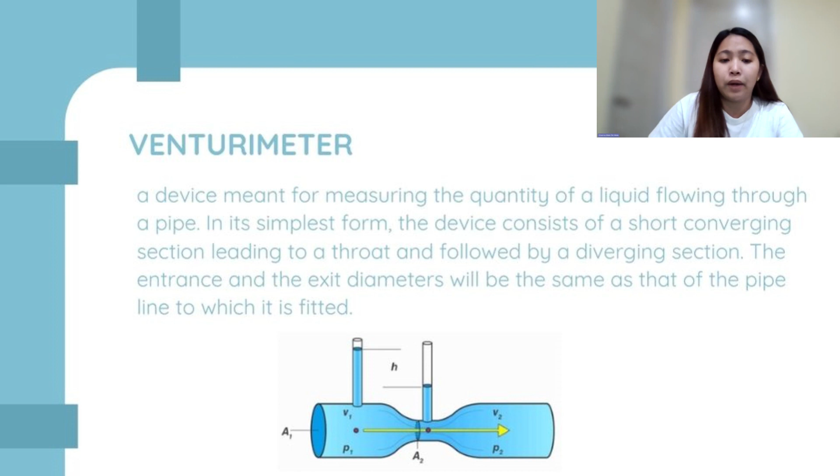A Venturi tube is a device designed to utilize the Venturi effect. It consists of three main parts: the converging section, the part of the tube where the diameter gradually decreases; the throat, the narrowest part of the tube where the flow is fastest and the pressure is lowest; and the divergent section, the part of the tube where the diameter gradually increases again.

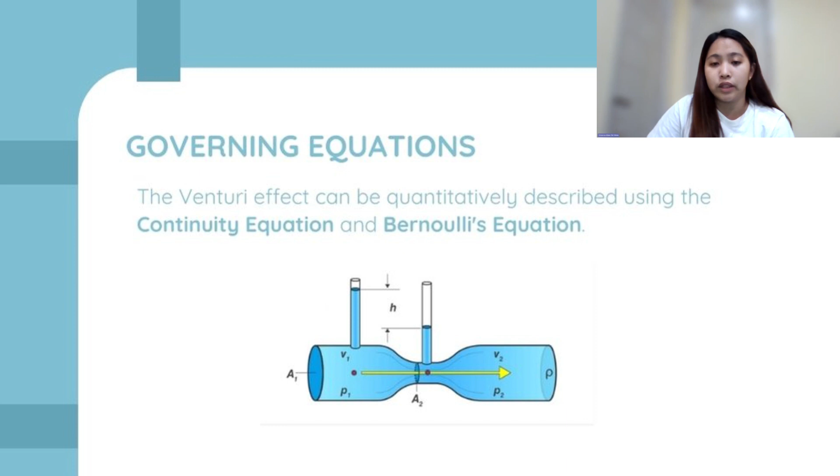Next, the governing equations. The Venturi effect can be quantitatively described using the continuity equation and Bernoulli's equation. The continuity equation ensures the conservation of mass for an incompressible fluid: A1 times V1 equals A2 times V2, where A1 and A2 are the cross-sectional areas of the pipe at points 1 and 2, and V1 and V2 are the fluid velocities at points 1 and 2.

The continuity equation is a fundamental principle in fluid dynamics that ensures the conservation of mass in a fluid flow system. It states that for an incompressible fluid, one whose density remains constant, the mass flow rate must remain constant from one cross-section of a pipe to another.

Mathematically, for a fluid flowing through a pipe with varying cross-sectional areas, the continuity equation is expressed as A1 times V1 equals A2 times V2, where A1 and A2 are the cross-sectional areas at points 1 and 2, and V1 is the fluid velocity at point 1, and V2 is the fluid velocity at point 2.

Conservation of mass: the continuity equation is derived from the principle of conservation of mass for an incompressible fluid. The amount of fluid entering a section of the pipe must equal the amount of fluid exiting the section.

Regarding flow rate, the product of the cross-sectional area and the velocity at any point in the pipe gives the volumetric flow rate. The flow rate remains constant along the pipe, so Q1 equals Q2, where Q1 equals A1 times V1, and Q2 equals A2 times V2.

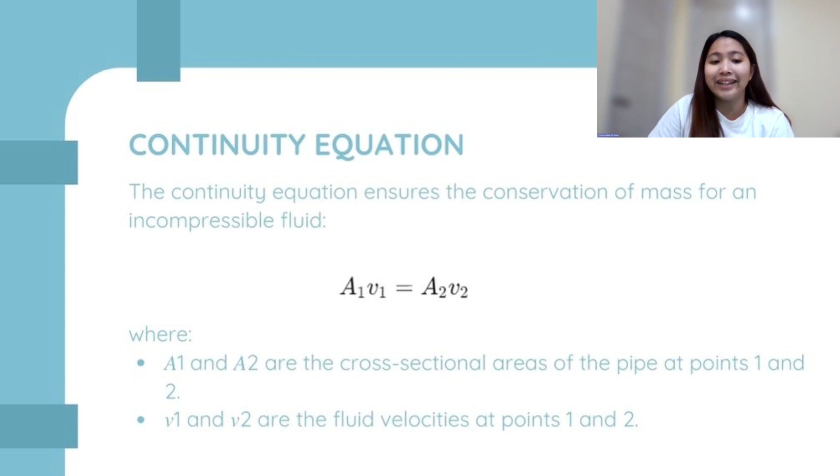Regarding implications for velocity: if the cross-sectional area of the pipe decreases, as in a venturimeter, the fluid velocity must increase to maintain a constant flow rate. Conversely, if the cross-sectional area increases, the fluid velocity decreases.

Next is Bernoulli's equation in the Venturi. Bernoulli's equation relates the pressure, velocity, and height in the flowing fluid: P1 plus one half density times velocity1 squared plus density times gravity times height1 equals P2 plus one half density times velocity2 squared plus density times gravity times height2.

P1 and P2 are the pressures at points 1 and 2, and density is the fluid density. V1 and V2 are the fluid velocities at points 1 and 2, and H1 and H2 are the heights at points 1 and 2. Often, H1 equals H2 if the pipe is horizontal.

Combining these two equations helps explain the Venturi effect. As the fluid enters a narrow section of the pipe, its velocity increases and its pressure decreases. Bernoulli's equation is a fundamental principle in fluid dynamics that relates the pressure, velocity, and height at different points along a streamline. For an incompressible and non-viscous fluid, it expresses the conservation of mechanical energy in the fluid flow.

For a streamline flow, Bernoulli's equation is given by P plus one half density velocity squared plus density gravity height is equal to constant, wherein P is the fluid pressure, density is the fluid density, V is the fluid velocity, G is the acceleration due to gravity, and H is the height above a reference level.

Application in venturimeter. A venturimeter consists of a convergent section, a throat or the narrowest part, and a divergent section. It measures the flow rate by taking advantage of the relationship between pressure and velocity changes as fluid flows through different cross-sectional areas. In the context of a venturimeter, Bernoulli's equation can be simplified, assuming the height difference H is negligible, or horizontal flow.

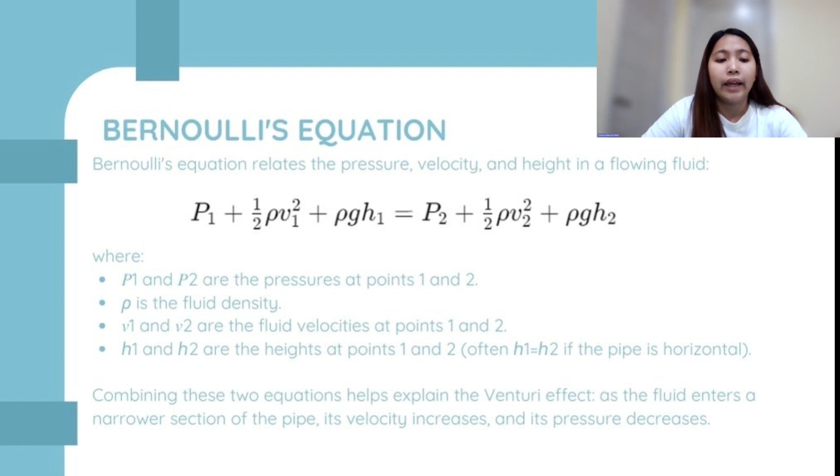Pressure-velocity relationship according to Bernoulli's equation: when fluid velocity increases, the pressure decreases, and vice versa. In a venturimeter, as the fluid enters the narrower throat, its velocity increases, causing a drop in pressure at the throat. Measurement principle: by measuring the pressure difference between the wider section, the entrance, and the narrow section, the throat, and knowing the cross-sectional areas, the flow rate of the fluid can be calculated using the continuity equation and Bernoulli's equation together.

The Venturi effect has several practical applications across different fields. First, flow measurement. Venturimeters are used to measure the flow rate of fluids in pipelines by measuring the pressure difference between the wide and narrow sections. The flow rate can be calculated.

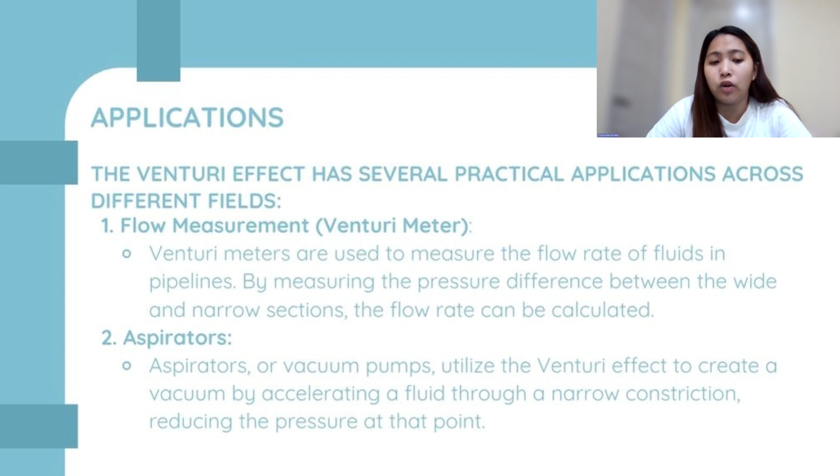Carburetors. In carburetors of internal combustion engines, the Venturi effect is used to mix air with fuel. The reduction in pressure in the narrow part of the carburetor draws fuel into the airstream.

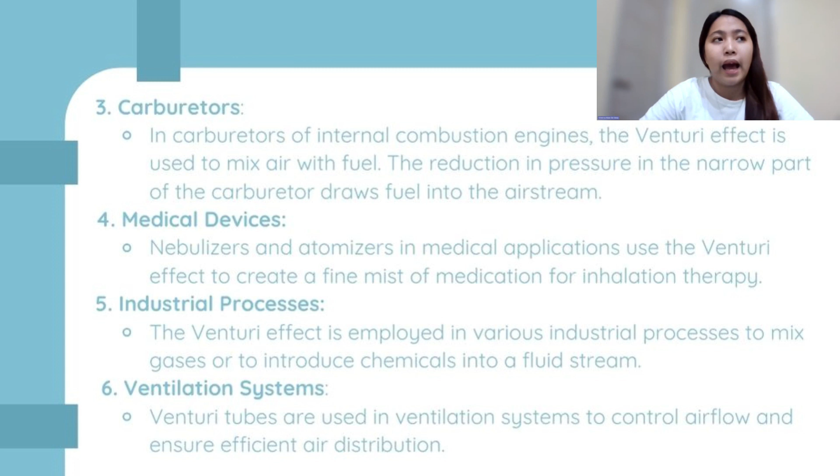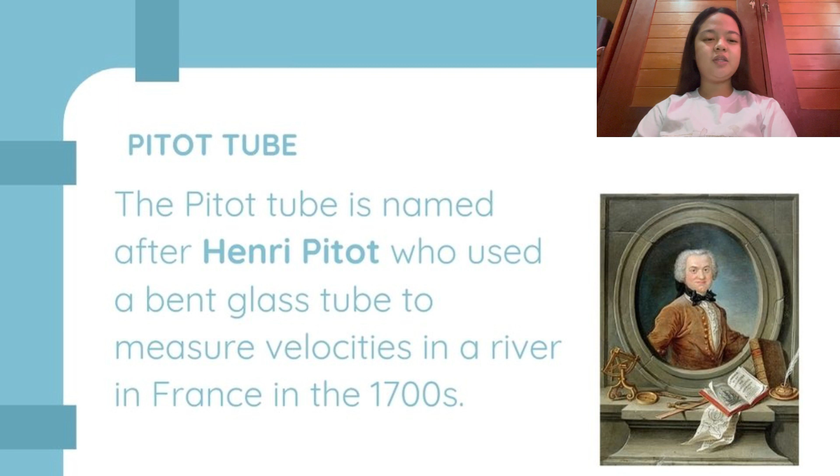The pitot tube is named after the French engineer Henri Pitot, who used a bent glass tube to measure velocities in a river in France in the 1700s. They are widely utilized in various fields, including aerodynamics, meteorology, and industrial applications.

A pitot tube is a simple device meant for measuring the velocity of a liquid at any point. In its simple form, it consists of a glass tube whose lower end is bent at right angles. The device is placed in a moving liquid with the lower opening directed upstream. The pitot tube has an open end that faces directly into the fluid flow.

When fluid enters this end, it is brought to a halt at the stagnation point, and its kinetic energy is converted into pressure energy. This creates a higher pressure called the stagnation or total pressure.

The static pressure is measured using the static port, which is typically a series of small holes on the side of the tube or a separate static tube. These holes are perpendicular to the fluid flow and measure the pressure exerted by the fluid without any influence from its velocity. Then, Bernoulli's equation relates the pressure and velocity of a fluid flow.

It states that the total pressure, or stagnation pressure, is the sum of the static pressure and the dynamic pressure, which is the pressure due to the fluid's velocity. So in summary, a pitot tube measures the stagnation pressure and static pressure in a fluid flow. By applying Bernoulli's equation, the fluid velocity can be accurately determined.

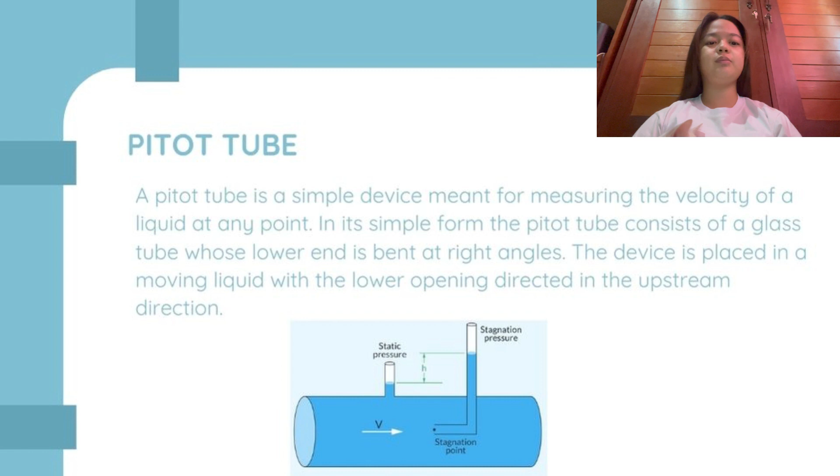Let's move to the advantages and disadvantages of pitot tubes. Here I have listed three of each. First is simplicity and cost-effectiveness. Pitot tubes are relatively simple devices with straightforward construction, making them cost-effective compared to more complex flow measurement instruments.

Second is wide range of applications. They are versatile and can be used in a variety of environments, from airspeed measurements in aviation to fluid flow in industrial processes. The third advantage is durability. Made from robust materials, pitot tubes can withstand harsh conditions, making them suitable for demanding environments.

The disadvantages of pitot tubes include being limited to clean fluids. Pitot tubes are generally best suited for clean fluids; in dirty or particulate-laden environments, performance and accuracy can be compromised. Second is susceptibility to clogging. Pitot tubes can become clogged by debris or particulate matter in the fluid, which can affect accuracy and require frequent cleaning. The third disadvantage is that placement inside the pipework is critical.

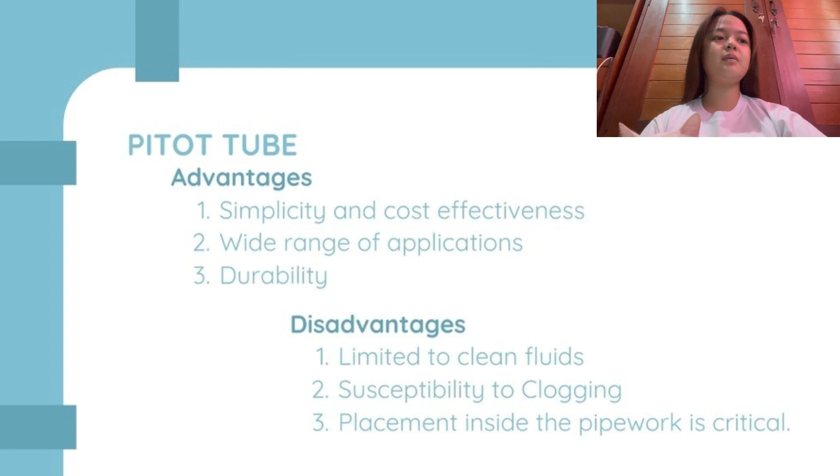Maybe you are wondering whether or not pitot tubes are important in electrical engineering. Though primarily associated with fluid dynamics, pitot tubes hold significant importance for electrical engineers in various applications and contexts. I have listed some of their importance in the field of electrical engineering.

First is wind turbine optimization. In the renewable energy sector, particularly in wind energy, pitot tubes are used to measure wind speeds accurately. This data helps electrical engineers optimize turbine performance and efficiency.

Second is environmental monitoring. Electrical engineers use pitot tubes in systems designed for environmental monitoring, such as measuring wind speeds for weather stations and environmental impact assessments.

Third is airspeed sensors. Electrical engineers working in aerospace and aviation heavily rely on pitot tubes for airspeed measurement. Accurate airspeed data is critical for flight control systems, navigation, and safety.

The last one I have listed is innovation in measurement technologies. Electrical engineers contribute to developing advanced measurement technologies where pitot tubes are involved.

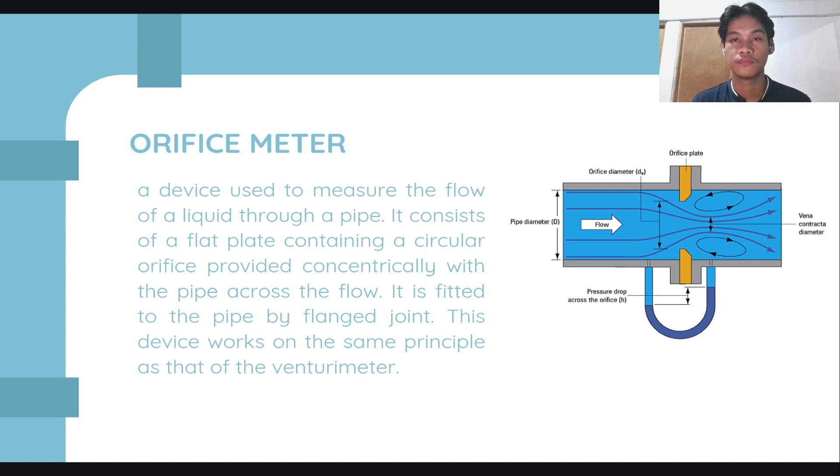Let's go now to the advantages and disadvantages of the orifice meter. First, the advantages. First is simplicity and cost: orifice meters are relatively simple in design and cost effective compared to other flow measurement devices. Number two is versatility: they can be used for a wide range of fluids, including gases, liquids, and steams. Last is no moving parts: the lack of moving parts reduces maintenance needs and increases reliability.

Now the disadvantages. The first is pressure loss: orifice meters create a significant permanent pressure drop due to the restriction of the orifice plate, which affects the efficiency of the system. The next is accuracy: it is influenced by factors such as flow disturbances, wear and tear of the orifice plate, or buildup of debris in the fluid. And last is rangeability: they have a limited range of flow rates over which they can provide accurate measurements.

Let's go now to the applications of orifice meters. Number one is oil and gas: they are used for measuring the flow of natural gas and petroleum products. Second is water treatment: for monitoring water flow in treatment plants. Third is chemical processing: for controlling and measuring the flow of chemicals in process industries. Last is power generation: for measuring steam and other fluids in power plants.

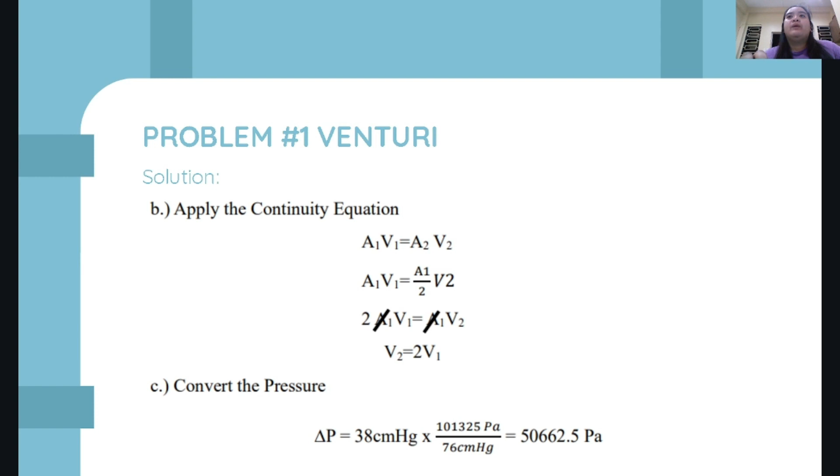Ngayon, isi-substitute naman yung continuity equation. So, magiging delta P over density plus V1 squared minus 2V1 squared over 2GC is equal to 0.

I-input na natin yung mga given. Since water yung ating liquid, ang gagamitin nating density ay yung density ng water. Isi-substitute na nga natin yung 50,662.5 Pascal over 1,000 plus V1 squared minus 4V1 squared over 2, at yung ating gravitational constant ay equal to 0. Gagamit lang tayo ng algebra dito, mga cross-multiply.

Since naka-squared yung ating V1, para makuha natin siya, kailangan natin siyang i-square root both sides. Solving this, makuha natin na yung ating velocity 1 is equal to 5.81 meter per second.

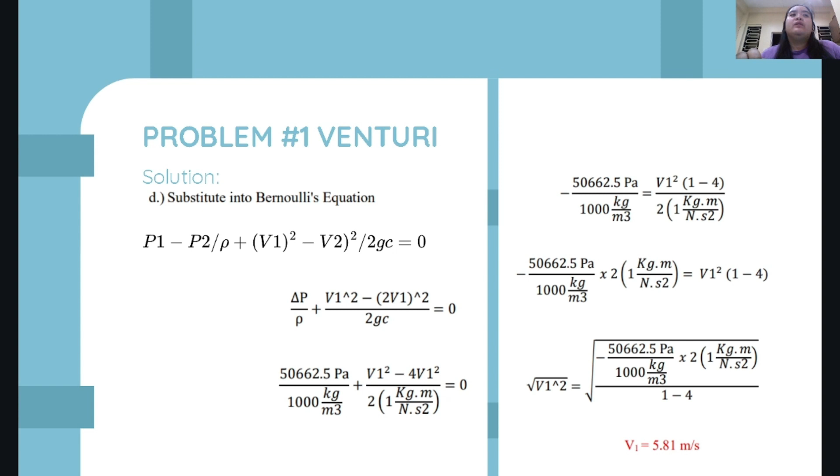Pitot static tube is mounted on an aircraft traveling at a speed of 300 km per hour against a wind velocity of 20 km per hour. If the specific weight of air is 12 Newton per cubic meter, determine the pressure difference the instrument will register.

Ang given natin dito, ang hinanap natin sa problem na to ay yung pressure, yung difference ng pressure. Aircraft velocity is equal to 300 km per hour. Para ma-convert natin siya sa meter per second, i-multiply natin siya sa 1,000 meter over 1 kilometer times 1 hour over 3,600, which makukuha natin tong 83.333 meter per second.

Sa wind velocity naman, gano'n din ang gagawin natin: 20 km per hour times 1,000 meter over 1 kilometer times 1 hour over 3,600 seconds is equal to 5.556 meter per second. Ang total velocity natin, V, is equal to 83.333 plus 5.556, equal to 88.889 meter per second.

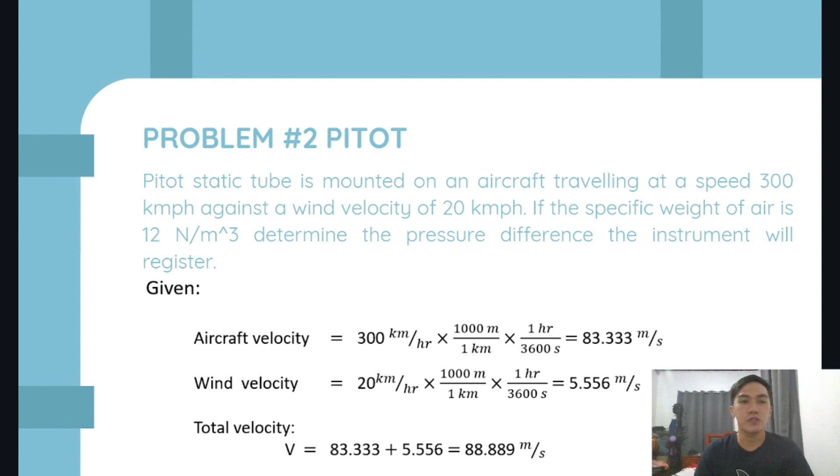Mag-proceed na tayo sa ating solution. Ang formula ng Pitot problem ay V is equal to CV square root of 2 multiplied by gH. Since meron na tayong V na nakuha natin, which is 88.889, ang gagawin na lang natin ay direct substitution: 88.889 equal 0.98 square root of 2 times 9.81 times h.

Isip solve lang natin. Ang lalabas dyan ay 419.319 meter. Ito yon, yung 419.319 meter, which is yung h na hinahanap natin sa ating formula.

Doon sa problem natin, ang hinahanap natin ay yung pressure, yung difference pressure. Para makuha natin yun, ganito ang gagawin natin: Delta P is equal to 419.319 meter times 12 Newton per cubic meter. Kunin ulit natin yung calculator natin: 419.319 times 12 is equal to 5,031.828 Newton per meter squared.

Kaya naging meter squared na lang siya kasi kakancel mo yung meter dito, tapos magiging square na lang to. Kaya ito yung final answer natin: 5,031.828 Newton per meter square.

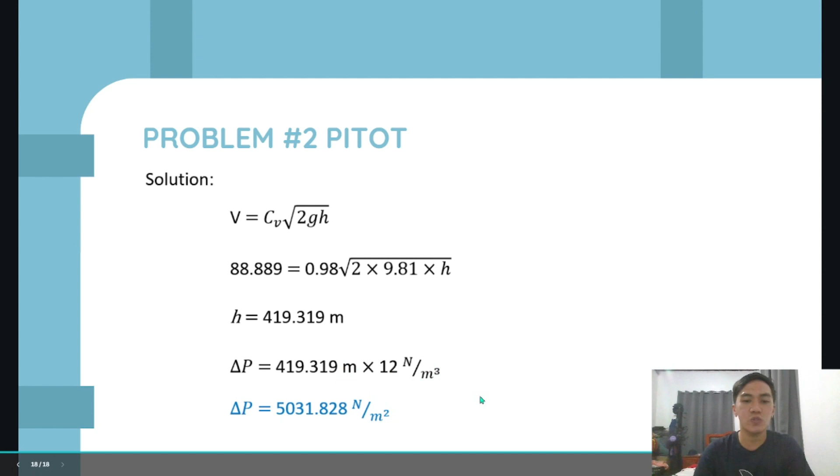Thank you. So now let's go to the flow rate calculation of the orifice meter. As you can see in the equation, Q is equal to CD multiplied by A multiplied by square root of 2GH, wherein Q is the flow rate, CD is the discharge coefficient, A is the area of the orifice, and G is the acceleration due to gravity, equivalent to 9.81 meter per second square, and H is the distance between the water level and the center of the orifice.

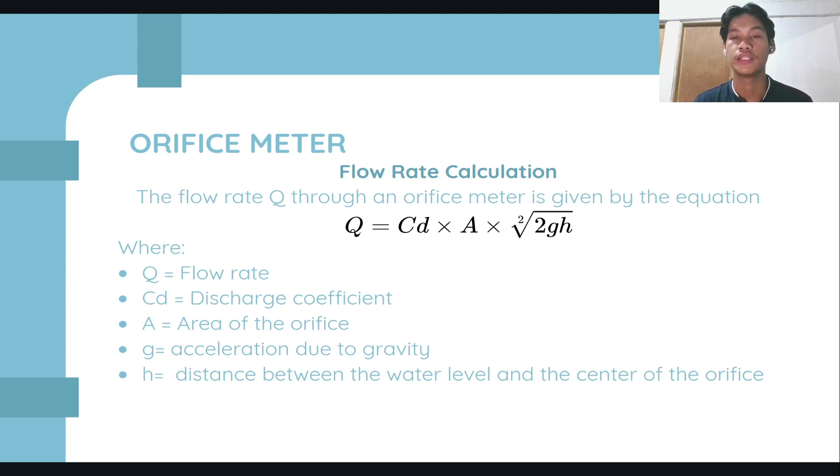Here is an example problem for the orifice meter. Determine the flow rate through an orifice that has a diameter of 50 millimeter and a mean center line of 200 millimeter. Take the coefficient of discharge, CD, as 0.8. Now let's list the given: first is the diameter, which is 50 millimeter; height of the orifice is 200 millimeter; and the discharge coefficient is 0.8.

So we are looking for the flow rate of the fluid. Using the equation, Q is equal to CD multiplied by A multiplied by square root of 2GH. Substituting all the given: 0.8 multiplied by the formula of the area of the diameter, pi over 4 times 50, converting the millimeter to meter.

Then we go to square root of 2 multiplied by the acceleration due to gravity, which is 9.81 meter per second square, and then multiplying the height, which is 200 millimeter, converting again to meter. Simplifying the equation: 0.8 times 0.002 square meter multiplied by 1.981 meter per second. Simplifying furthermore, we get Q is equal to 0.0032 cubic meter per second.